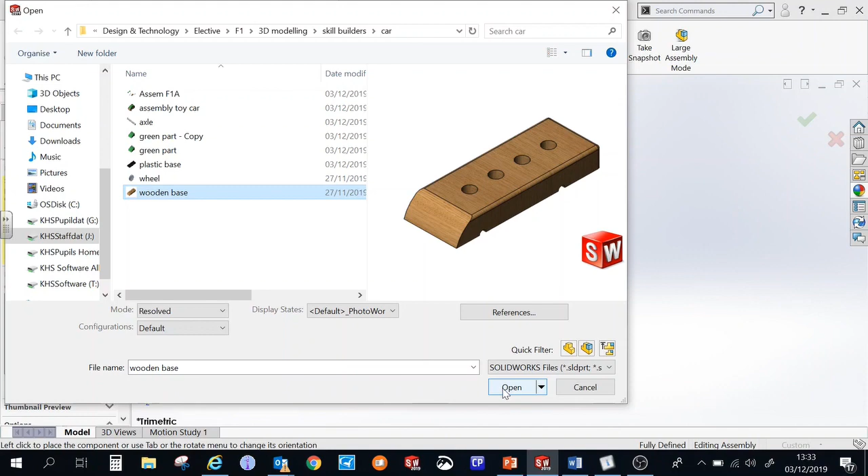So, File, New, Assembly, click OK. When you start an assembly, it will automatically ask which components you want to put in. Navigate to the folder where everything's saved, bring in the wooden base, and click to insert it. Then bring in your other components by going to Insert Components, bring in the plastic base, and click into the workspace when you're happy with where it's going.

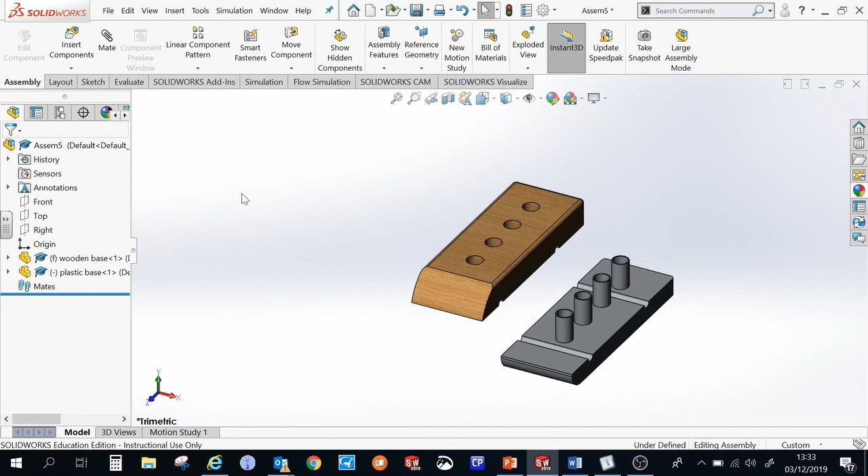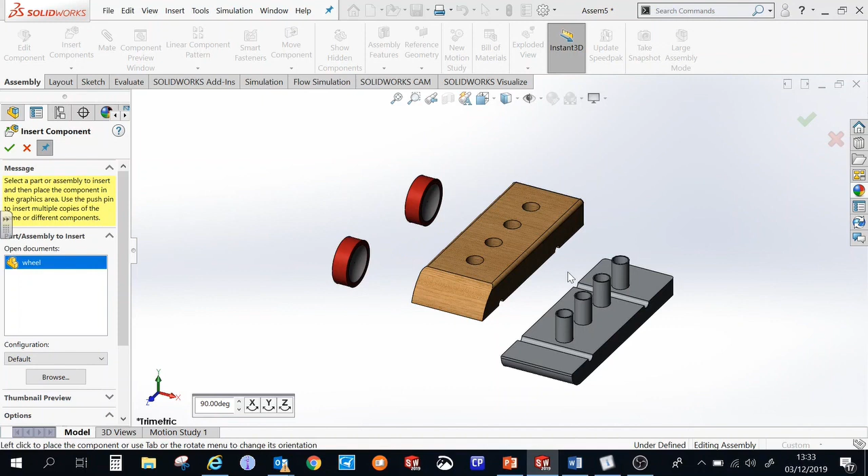Insert Components again and go to the wheel. Now we're going to do this slightly differently - we're not going to click yet. Go to your thumbtack, click on that, and this will allow us to insert multiple files. When you're happy with how many you've got in, hit the green tick in the Insert Components box.

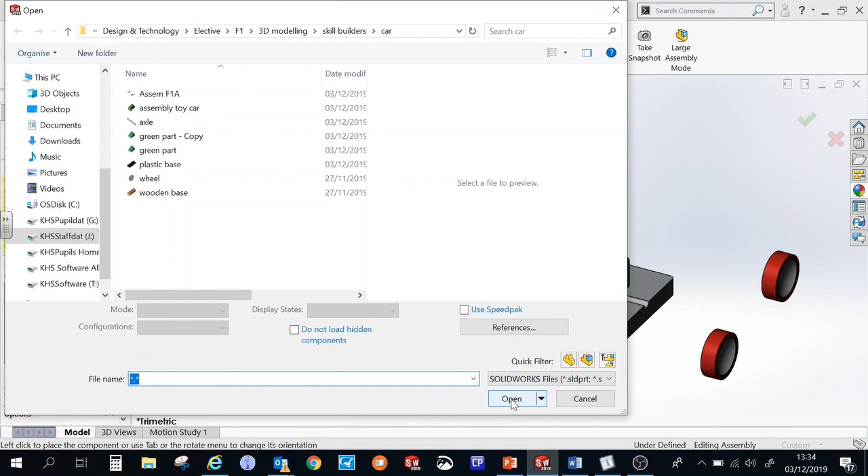Bring some more in - so you've got the axle to bring in. Again, because we have two of these, we use the thumbtack to click twice and green tick.

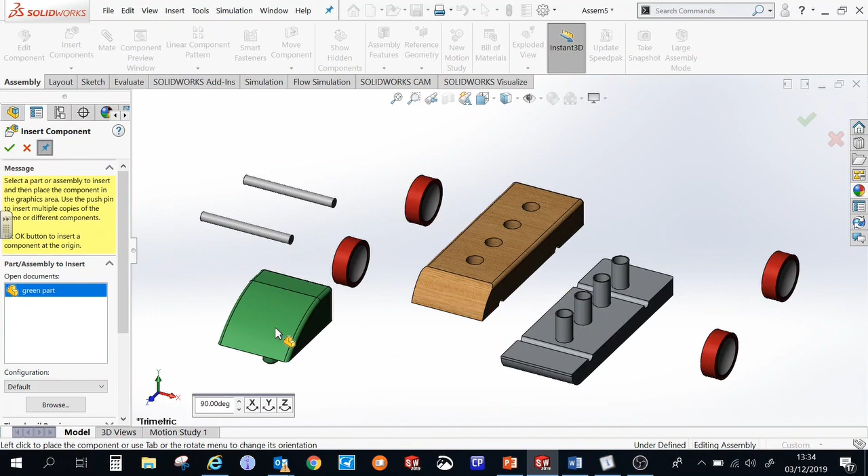Last component to bring in is the green part. Again we need two of this, so we'll put a little thumbtack on and drop them into this space. Green tick to finish. Okay, we're ready to start assembly now.

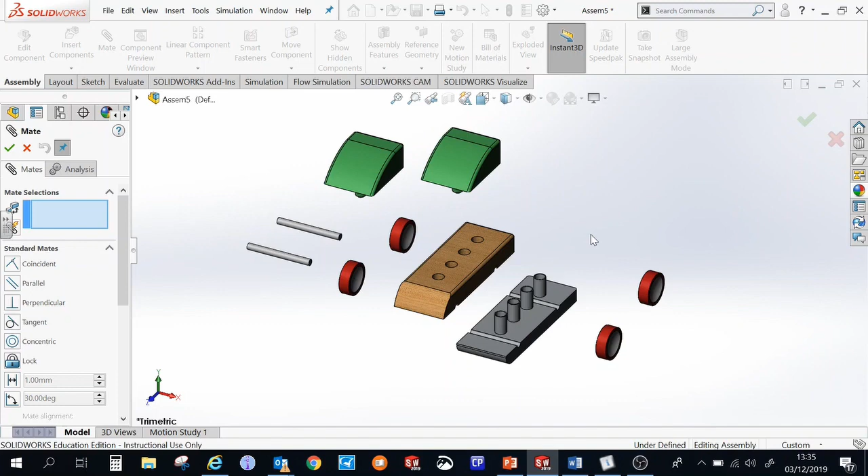Assembly is done using the mate command here, and we really need to think about what surfaces are actually going to touch. If you were going to assemble this together physically, what surfaces would touch? So the top surface here and that surface would touch. All you have to do is select them, it will add them to the mate selection box, and you green tick it.

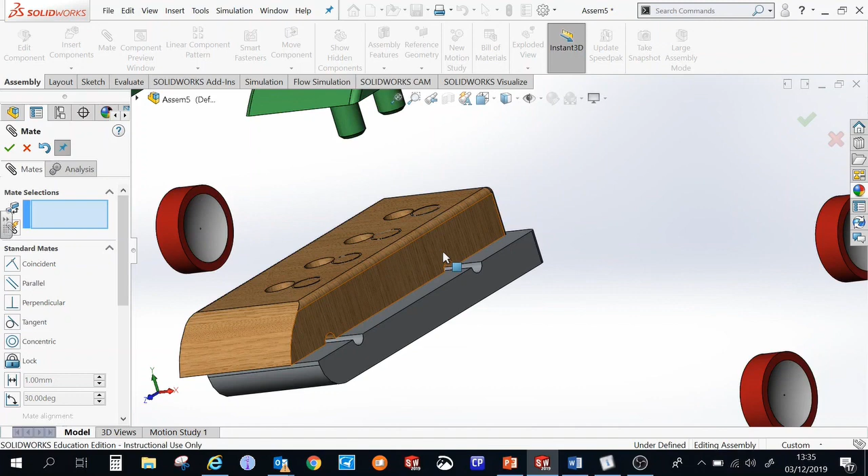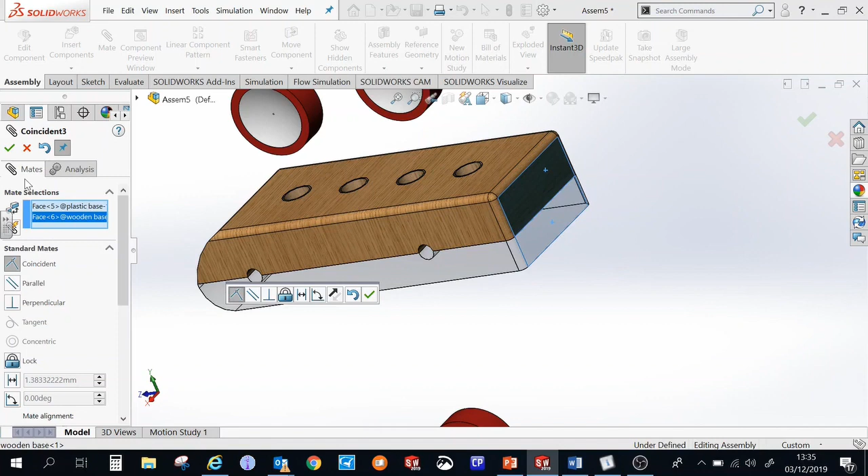We need to get these surfaces aligned, so let's add it to the mate selection - that's the one highlighted in blue. Click on that surface and that surface, and SOLIDWORKS automatically brings those together. Last one, this surface and this surface, and SOLIDWORKS automatically brings them together. That's your first two components assembled.

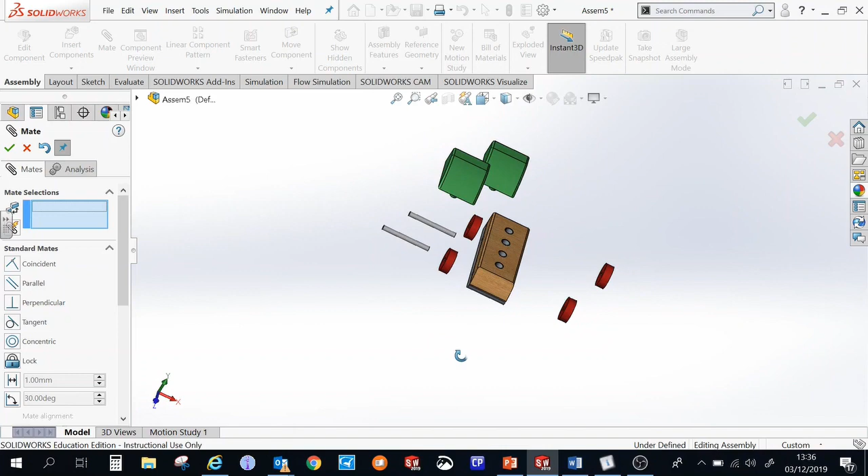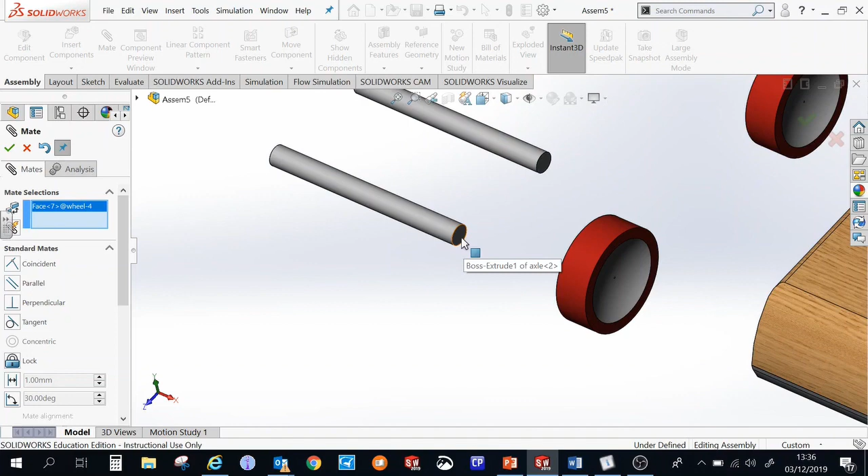Next we're going to assemble the wheel and the axles, outside of the body, so I'll show you how to do that easily. Flip your view so you can see the inner surface of the wheel, where this hole was drilled, and the end surface - we want that end surface there. Click on that, and we want the end surface of the axle. It's brought those two together.

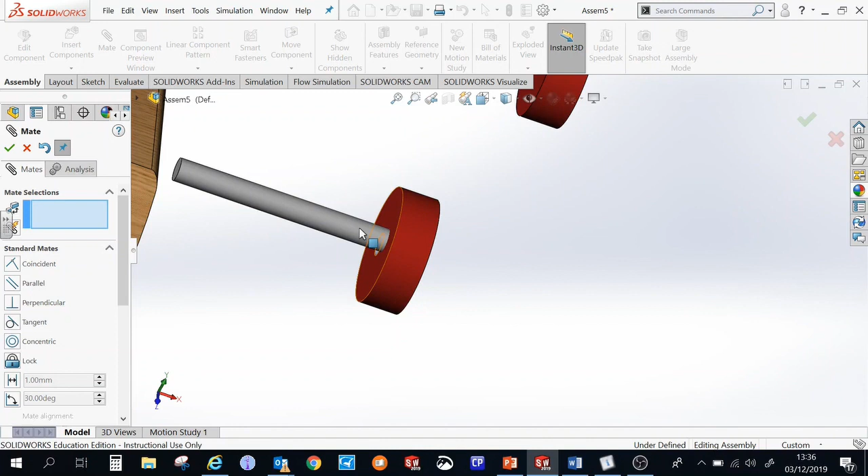We can tick them. However, I can still move things - they're able to move out with each other, they're not centre axised, not aligned properly. So to fix that, select the outer surface of the axle, and select the outer surface of the wheel, and you can see that they're now concentric - they share the same center. Click OK. That's one side of the wheel and the axle done.

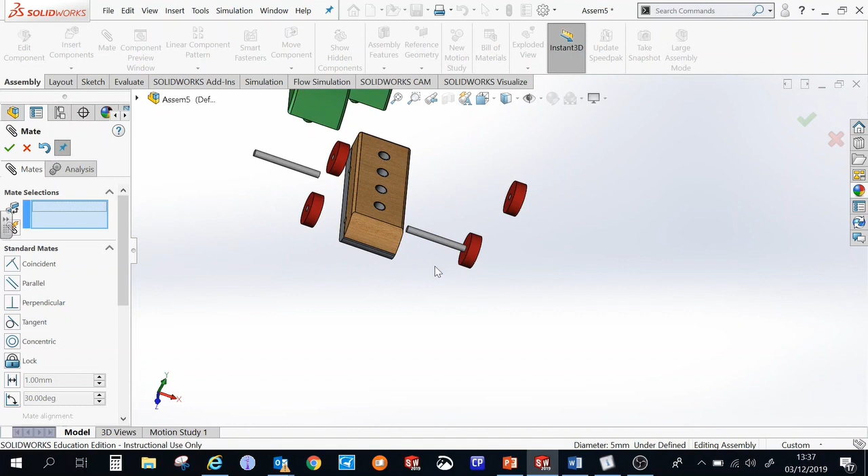We're going to go across and do the other side now. So we need to collect the surfaces - inner surface and the external surface there. Now you'll notice it's round the wrong way, not showing in the correct position.

We need to flip this wheel until it's round the other way. The way we do that is further down in this dialog box - scroll down, it's in the mate alignment. You can have aligned, which it is at the moment, or anti-aligned, and you can see the different effects. Click OK.

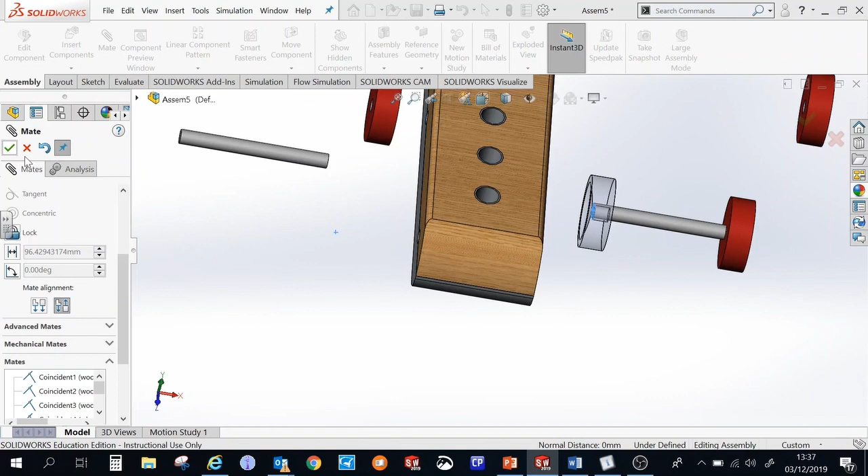As before, you can see it's not in the center yet - we need to get those concentric. So that's one more mate we're going to do: external surface of this, external surface of this, tick OK. And that's one wheel subassembly done.

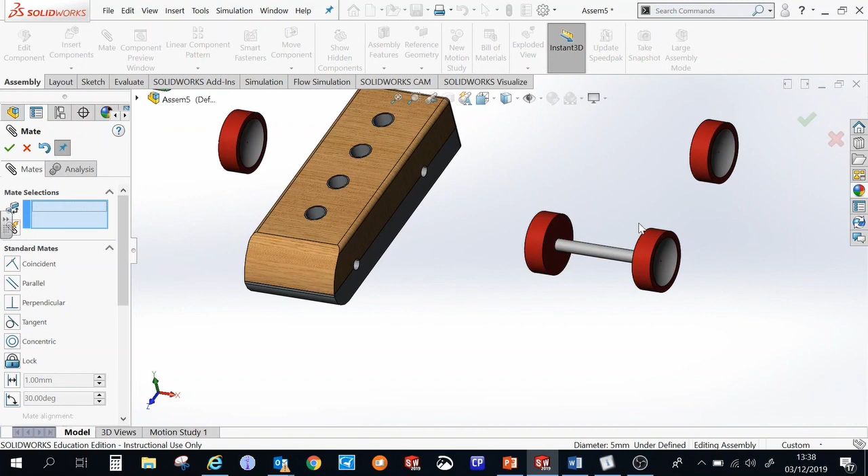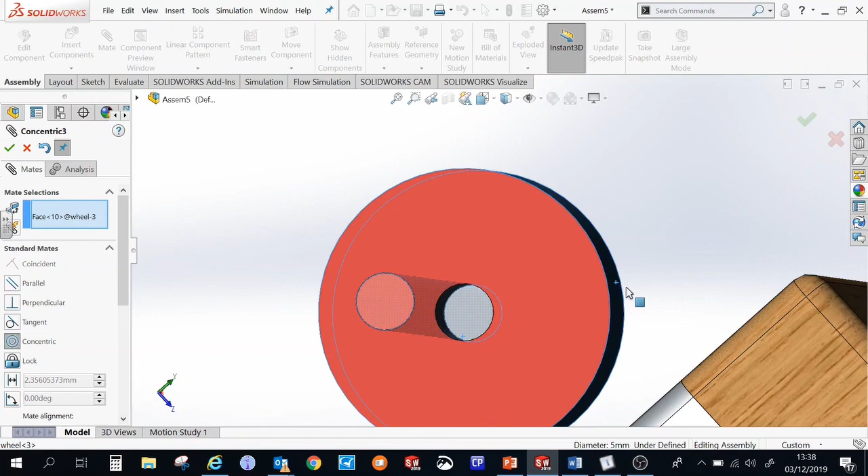We'll do the next set. End point of that axle is touching that surface there. We need this surface and this surface to be concentric. Click OK. We've got the next wheel to do.

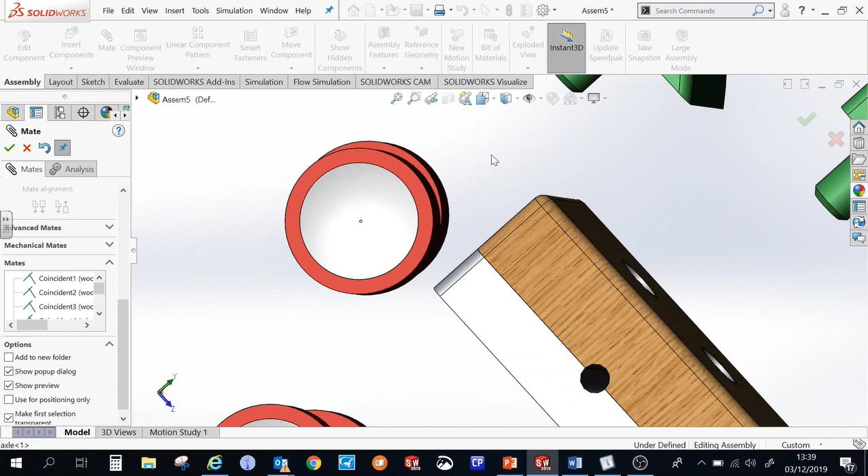We've got this internal surface, the external surface of the axle - it's round the wrong way, so we scroll down, use your mate alignment to flip that. Then your last mate, two external surfaces, cylinders - OK that.

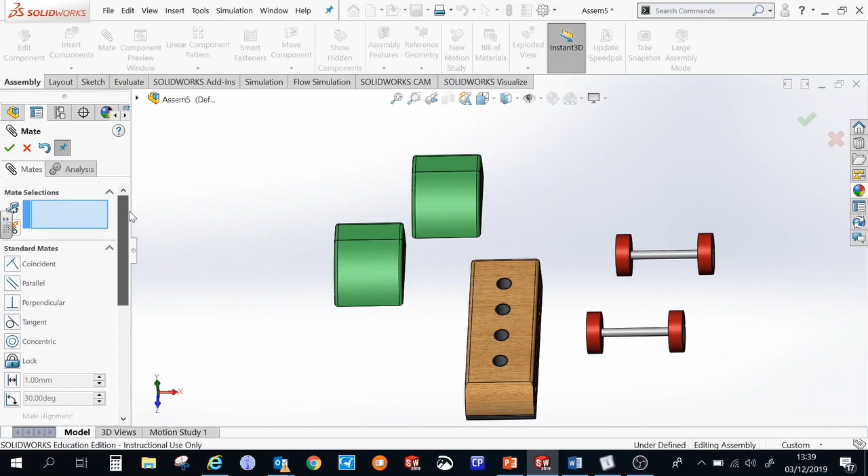And there's your second wheel and axle subassembly done. Now all we have to do is get these wheel subassemblies into the body subassembly. I'll scroll back up so you see what's going on. Let's select the inner surface of the wheel, and the inner surface of this wheel is going to touch this side of this body. I'll click OK.

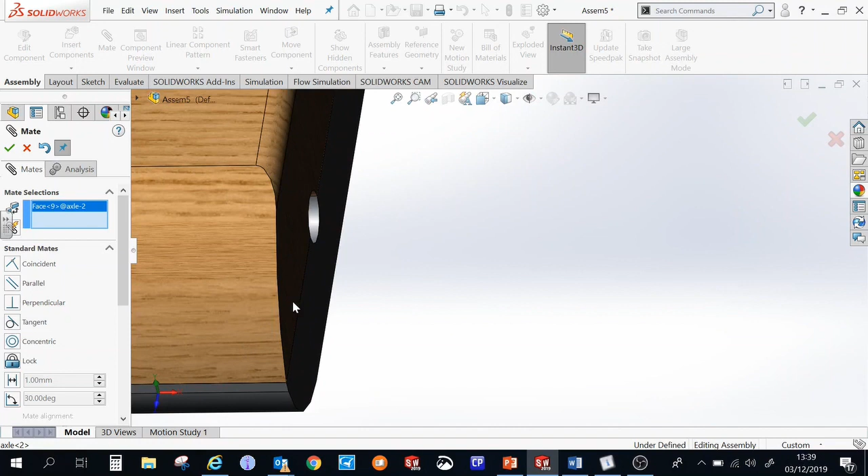We'll do the center axis now - so that's center axis and the center axis of the hole, and that's those two components together. So two mates and you've got the wheel in position.

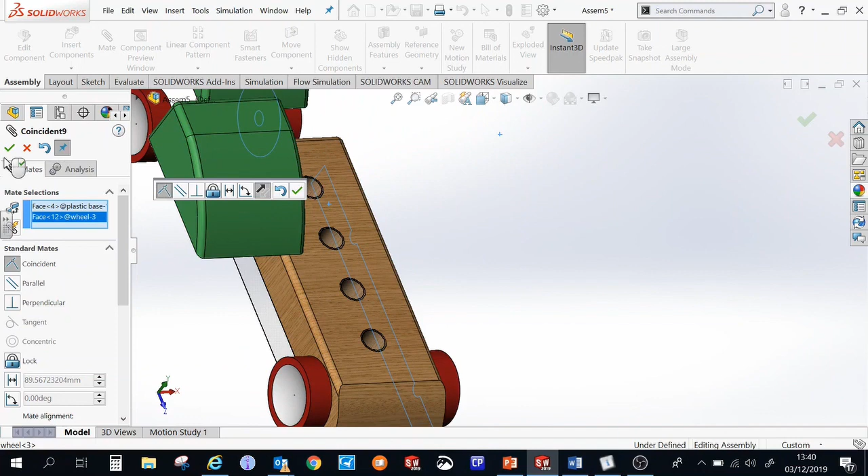So you can do it in any order - for example, I can select this surface and then this surface, click OK, and then I can do my concentric surfaces. Click OK.

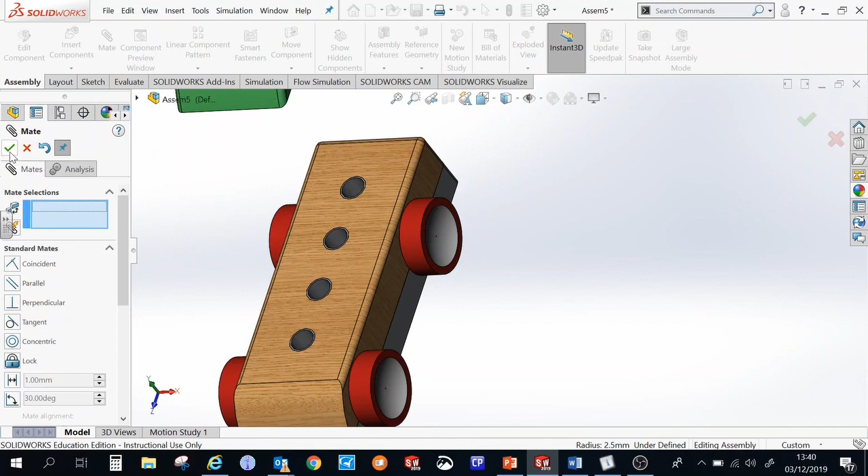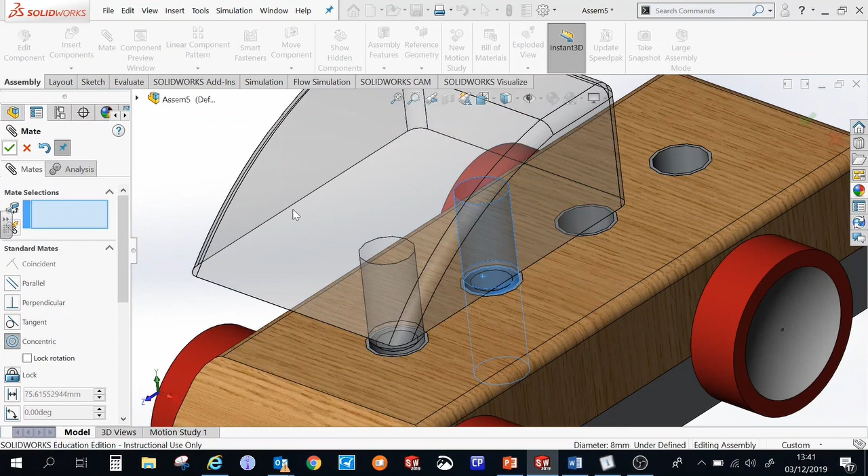And that's the body pretty much done apart from the green parts. To do them, I'm going to select this outer surface - it slots into this sleeve here. Green tick. I can still move at this point, still not fully confined or restrained it.

We need to select this surface and this surface. Click OK. So we're going to assemble the last component now.

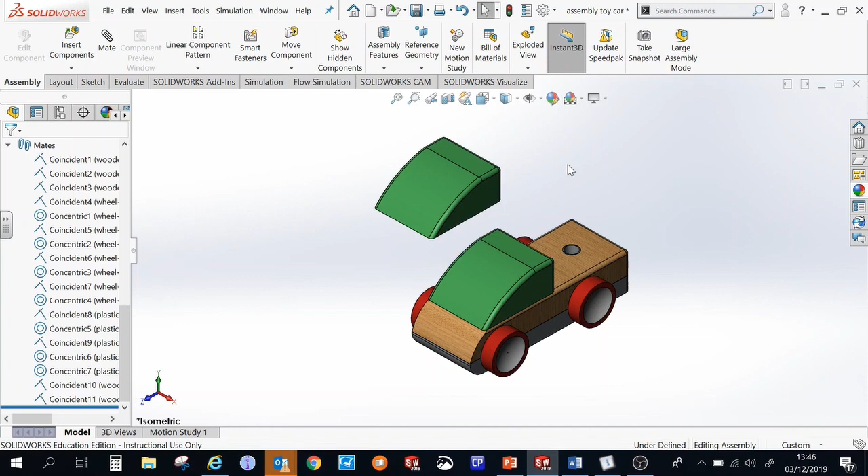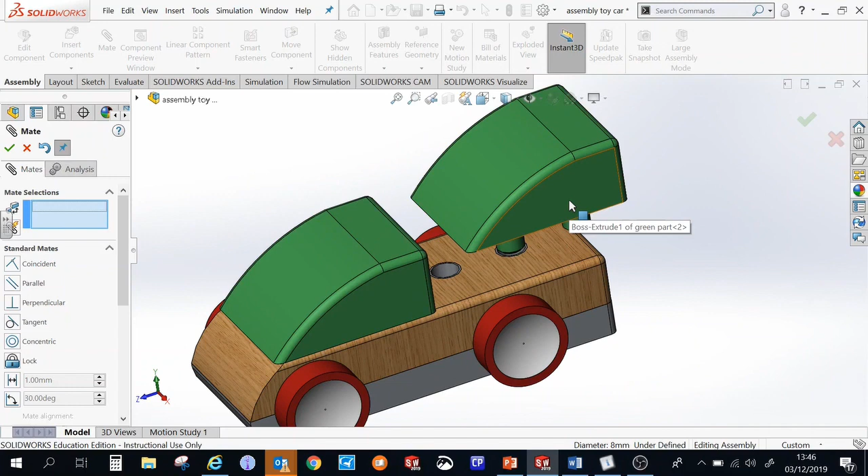We want the front cylinder, and this is going to go into the back cylinder here. Click OK. Now we've got a problem here because this is round the wrong way. So to get this in the right orientation, select this surface, flip your vehicle round and select that surface. Click OK.

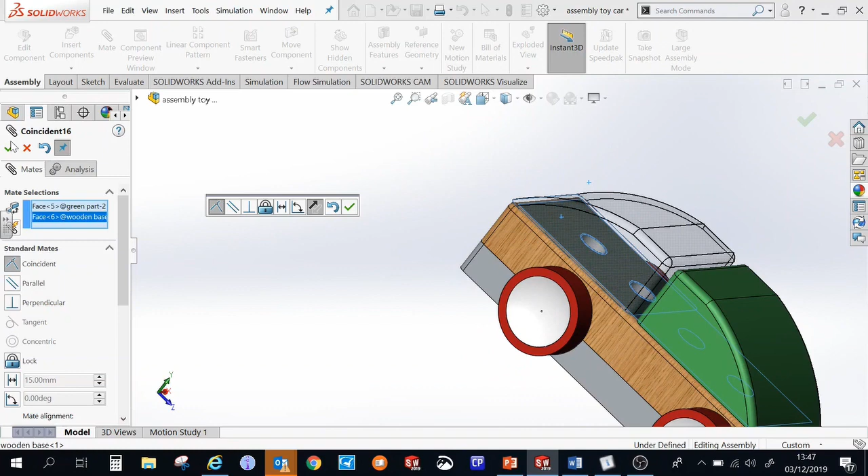Last two surfaces to come together - so we want the inner surface there, touching that surface. Green tick to finish. Remember, Control 7 gives you the pictorial view. Save. And you're done.